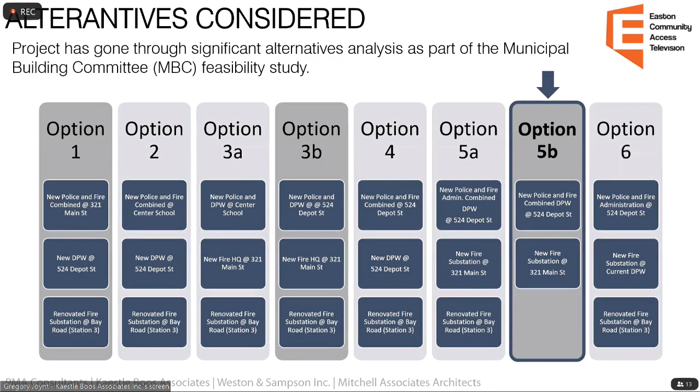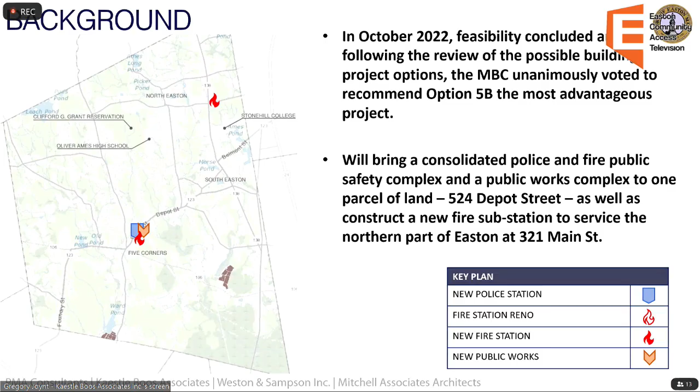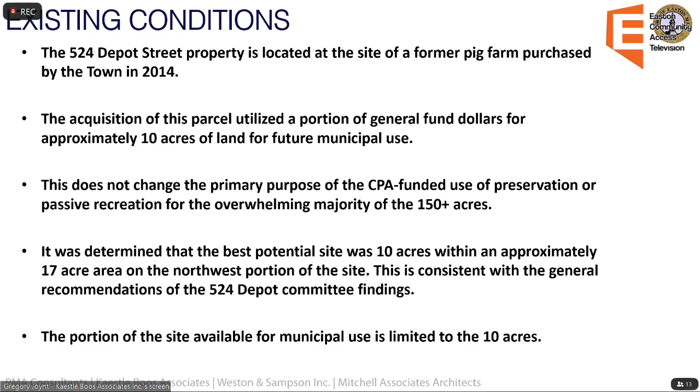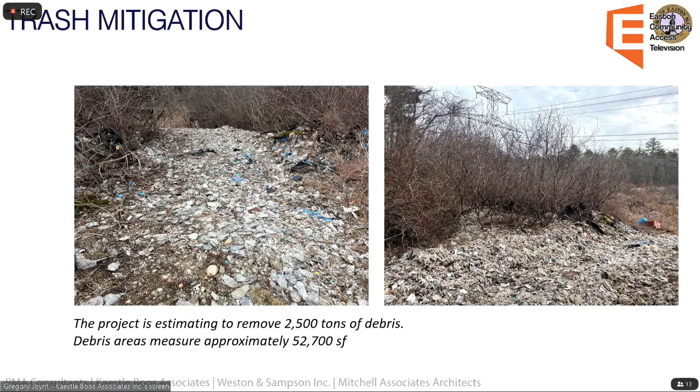One thing this project does achieve is significant trash mitigation on the existing site. There's about 2,500 tons of debris covering an area of about 53,000 square feet. A fairly significant benefit for the town being able to remove these items from the site and protect the surrounding area that's reserved for conservation or recreation, really in perpetuity.

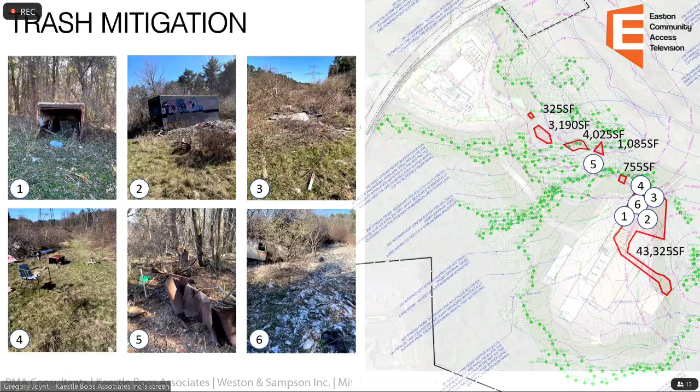You can see here the different areas of trash and debris scattered throughout the site. It ranges from tires and old trailers to old bottles and trash bags, plastic bags from old bread containers, milk bottles, and things like that. The trash is significant; however, it is relatively confined to these areas. It is all surface waste, so easily disposed of, though it is pretty extensive.

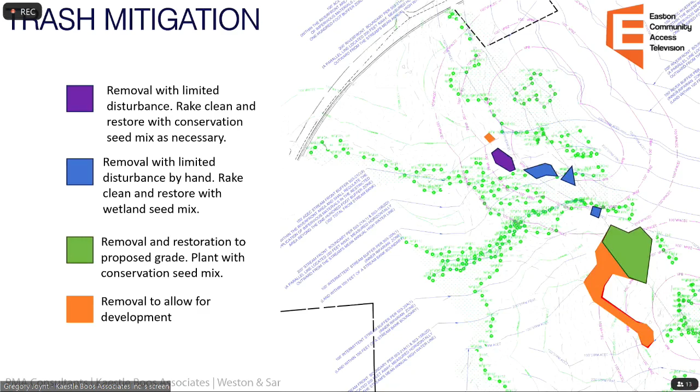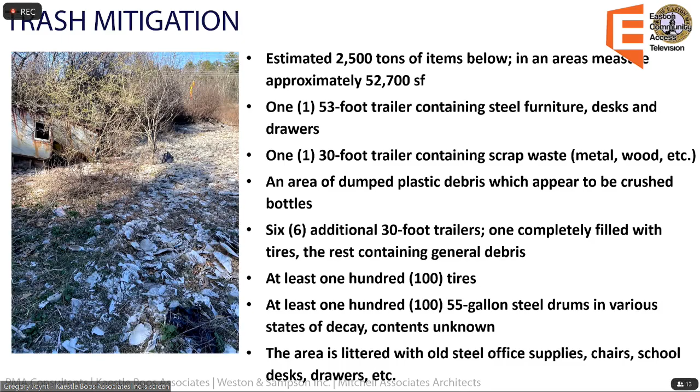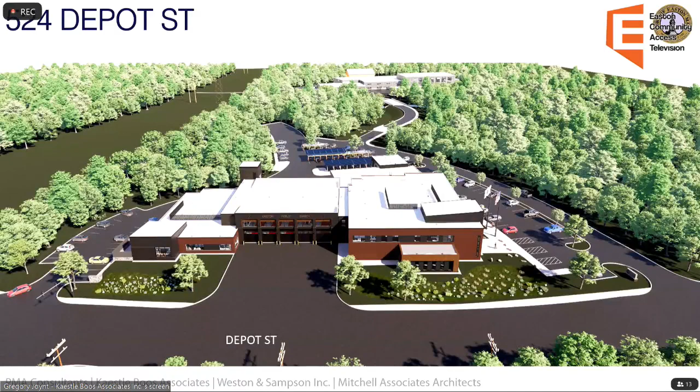You can see here, looking over Depot Street, so we're at the north of the site looking to the south, public safety in the front, with DPW, that large gray building behind in the back. Public entry will be on the right-hand side, so that right-hand drive lane is the public entry with public parking on the west of the site, along with a roadway to get back to DPW. Managing those wetlands, two bridges cross the wetland areas, so there is no permanent wetland impacts on the site. Only temporary impacts for construction are proposed.

In terms of schedule, our anticipated schedule would be to bid December, January, with mobilization starting in the spring of 2025, clearing and grubbing the site, at least the front portion, starting in summer of 2025. Excavation for bridges, the public safety building and roads would also be in summer of 2025. Setting the bridges would be in fall of 2025. The bridges will be set, and then we can begin clearing and grubbing of the DPW site, excavation for that DPW foundation in the winter of 2025. The public safety building and the public works building will ultimately be in construction simultaneously in some fashion, with the project anticipated to be complete by January of 2027.

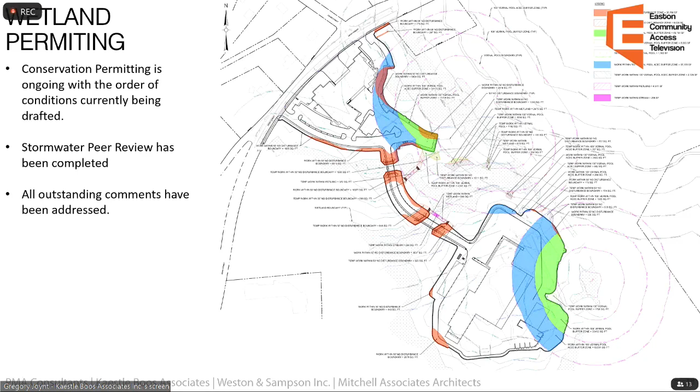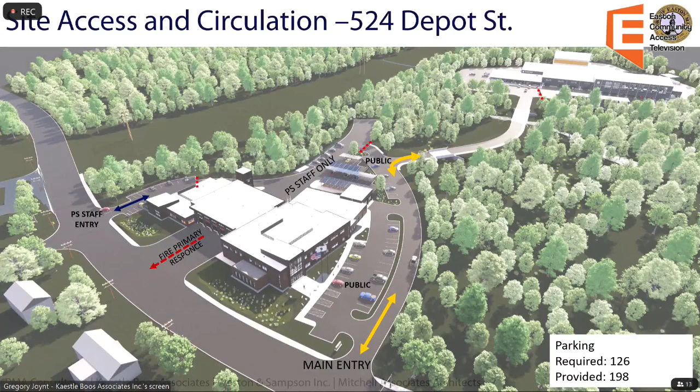Just a little bit more about the site. We'll get into a couple more details about the proposed construction. This is again looking over Depot Street, and we're going to talk a little bit about site circulation. The main entry is at the bottom here with the yellow arrow for public vehicular circulation, as well as circulation back to the DPW building. Public parking for the public safety building is on the left of that public drive lane, as well as the fire staff parking and public police staff parking, which would be on the exit and entry across from Cross Street, on the other side of the public safety building.

Primary fire response comes out the front of the building, and secondary fire line response comes out the back of the building, coming out that public safety staff entrance. Public Works is in the back of the site, across that roadway with bridges on it. Public safety staff parking is in the back, cordoned off from the rest of the site, so only police, fire, and DPW vehicles can be back in that area. I should note there is a large snow storage area in the back of that public parking, staff parking area, for snow storage on this site.

As we go back towards Public Works, again coming over the roadway, we're just spinning you around a little bit so you can see the front of the building. Public and staff parking out front in an accessible area. These red dashed lines indicate fences and gates, controlling access for vehicles during off hours and even during the day.

Vehicular operation for the DPW generally circulates counterclockwise around the building, keeping the drive lane clear and easily visible from drivers, so they're always looking on their side of the vehicle and able to see what's going on in the yard.

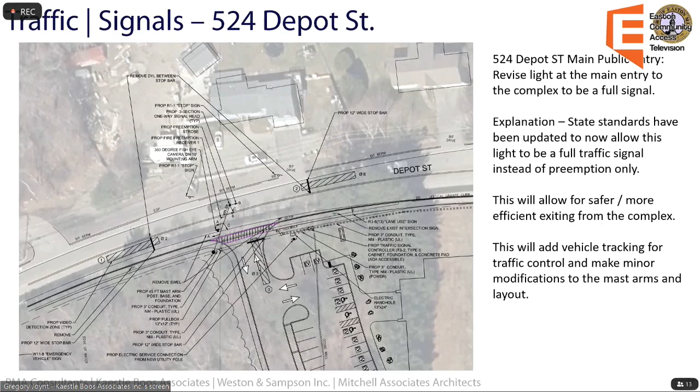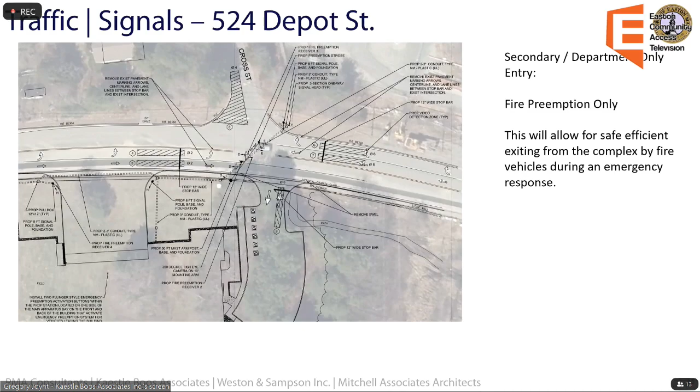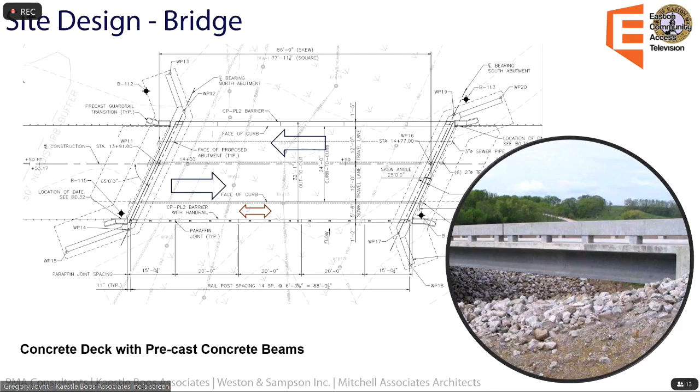The canopies have either recessed cans under them at most of the buildings, and at the fuel island they have a pretty standard light fixture you would see at a gas station. A couple of other minor lights, column lights, for accents, as well as sign lighting to light up and illuminate the permanent building signs for the complex.

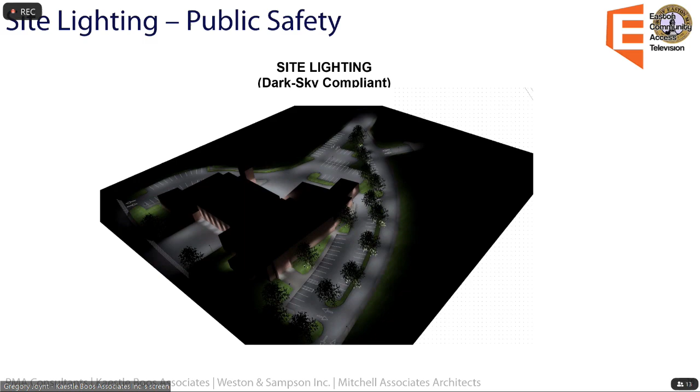In terms of what that results in for photometrics, we have a rendering here for the property. As you can see, it was really important for our team and the town to make sure we're cutting off our light as quickly as possible as we go into those areas of environmental concern with the wetlands.

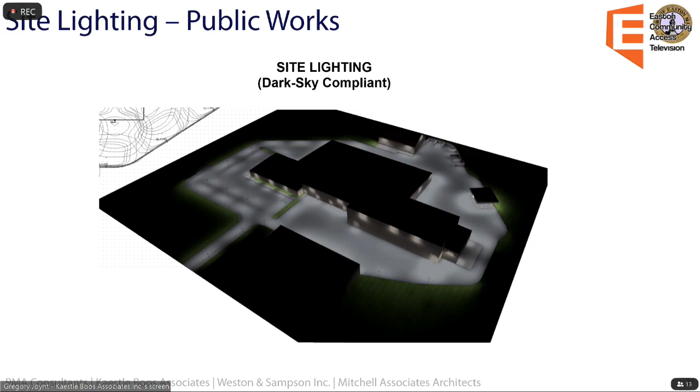We feel like we've done a pretty good job of keeping safe lighting levels on pavement, parking, and pedestrian ways, while cutting off quickly to get dark sky compliance as you go into the wetland areas. Back at DPW, it's the same process, but with much bigger areas given the size of the vehicles and operations. We're trying to cut off almost immediately as we get to those development lines outside of the paved area.

A little bit about our landscape and site improvements that we're proposing. Pretty typical for public projects: flagpoles, and most improvements will be large stone granite bollards or rock, as we look to ensure not only the aesthetic value of the project but also safety, keeping vehicles excluded from getting too close to the building.

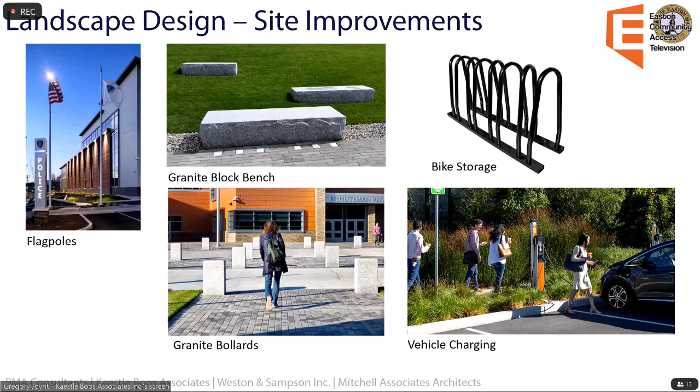The project will include bike storage racks as well as vehicle charging throughout, in different locations, with some accessible to the public and some for staff and department vehicles throughout the complex.

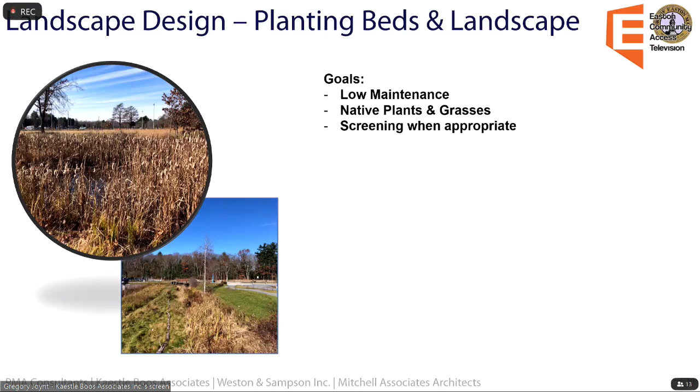In terms of landscaping, very minimal. We're really looking to make sure this is a low maintenance environment. So a mow strip around most areas for turf grass, turning to more of a conservation and wildflower seed mix.

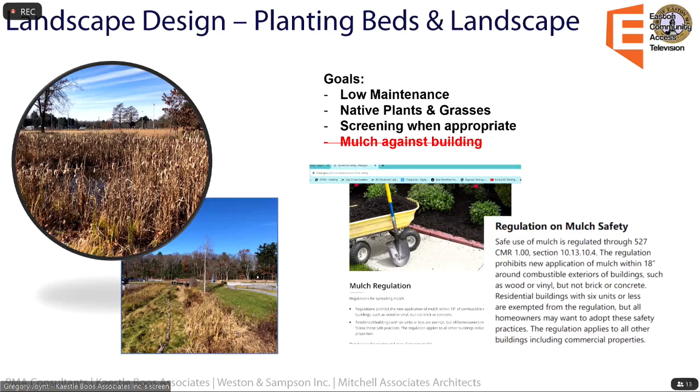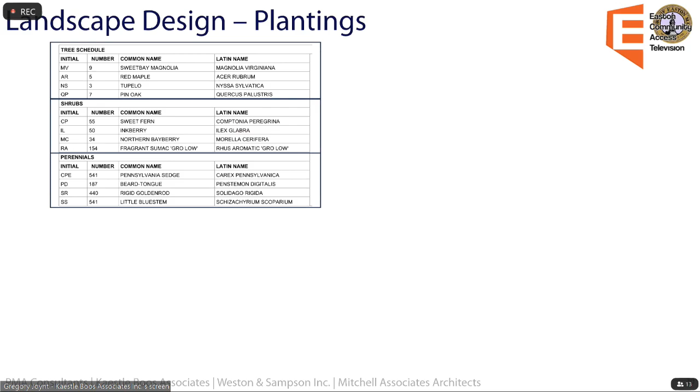No mulch up against the building, to make sure we're not starting fires with cigarette butts or things like that, keeping these buildings safe. In terms of plantings, all are proposed to be native species, with trees from red maple, magnolia, pin oaks, and it sounds like we might get some chestnuts too from the Conservation Commission. Again, straightforward, low maintenance, and native plantings.

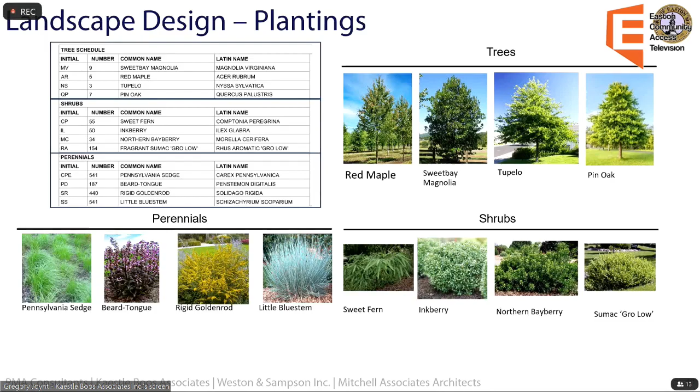In terms of stormwater, Elena's on, so if I make a mistake, she will correct me. But really there are 3 or 4 big areas where we're trying to treat stormwater.

The first is a bioretention swale. Bioretention swales are really an on-surface treatment of water, with treatment and storage happening in the same swale.

Subsurface, because of our site constraints, most of our treatment is subsurface, particularly up at public safety. Both subsurface detention and infiltration are proposed.

Surface infiltration, shown in the lighter green color, is a small area at public safety, but primarily back at DPW, where we're going into surface infiltration basins.

And then just a really minor area where we're going to some dry wells, along that corridor that gets you back to the Public Works facility, with catch basins and dry wells to pick up that small area of pavement.

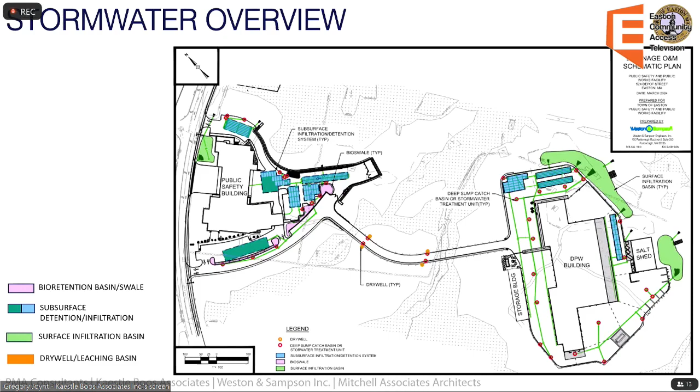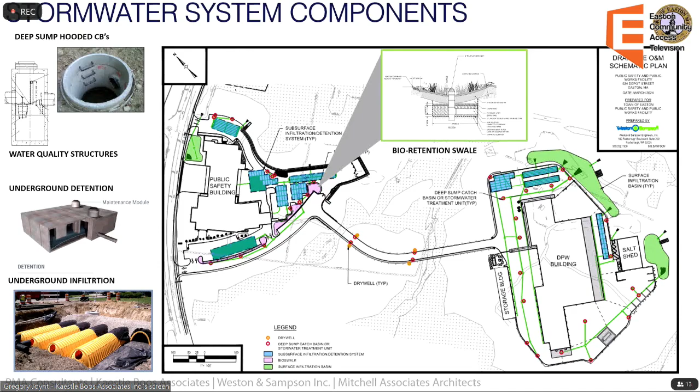We did touch on briefly the salt storage and fuel island. A couple things we want to address: all of the town's fueling operations, salt storage, and loading operations will move to this site back at the DPW.

On the site there's also a knockdown area, where gross cleaning can happen for trucks coming back after salt operations, as well as a full truck wash inside the DPW building that will clean the trucks and maintain the town's fleet safely for a long time.

The salt storage also includes a brine operation, a saltwater solution stored in tanks next to the salt storage shed. If folks have seen lines on the pavement before storms, that's brine, and that's what would be housed here adjacent to the salt storage shed.

That area also includes a loading ramp for safer, easier loading of the trucks, a small raised area where the loader can drive up onto instead of lifting all the way over the bed of the trucks, providing for safer operations.

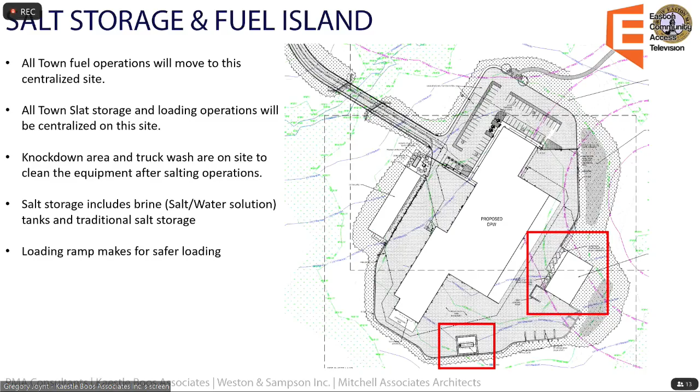Just a bit about what they look like: the salt storage shed is proposed to be a fabric membrane tensile structure, with push walls keeping the salt contained even if a loader pushes against it, making sure we keep the surrounding environment safe.

The salt is dropped entirely inside the facility, and as best practice, it's raised up a little above the surrounding area so that any runoff goes directly to the stormwater management system and not into the salt storage area. As for the fuel island, the tanks are all double-walled above-ground tanks, with no buried tanks here.

10-gallon remote fill box, so no real issues with minor leaks or things like that. Both tanks are equipped with overfill prevention, so you can't overfill the tank, as well as audible alarms for high level to prevent overfilling. Spill buckets with absorbent materials, pads, brooms, everything you need for spill containment is included in the project and is with the fuel island.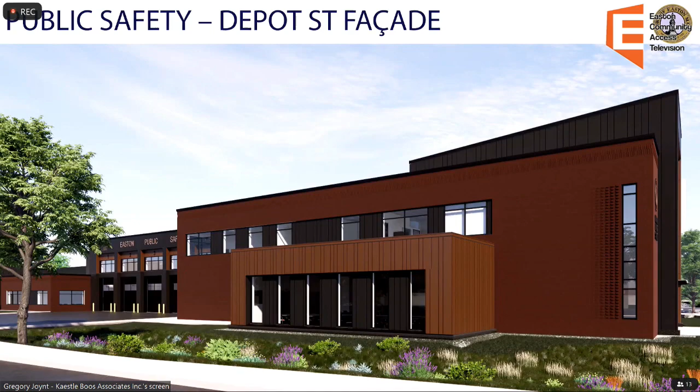As we go kind of along Depot Street, seeing the front of the building, as we go west to east along Depot.

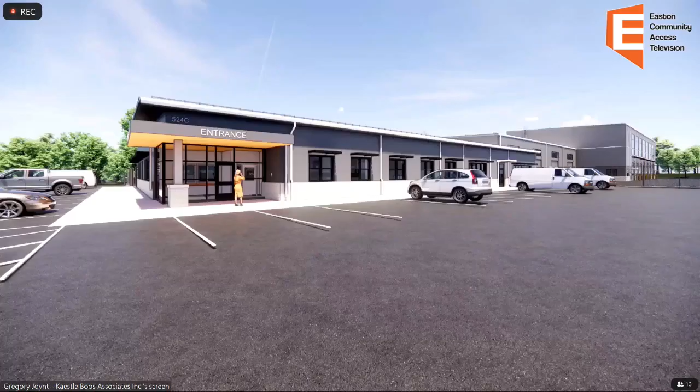Coming back around into the public parking lot, a large main entry signage on the building. This is really the public entry and face for the public safety building. And back to the public works building, again, public face for public works in the back of the site.

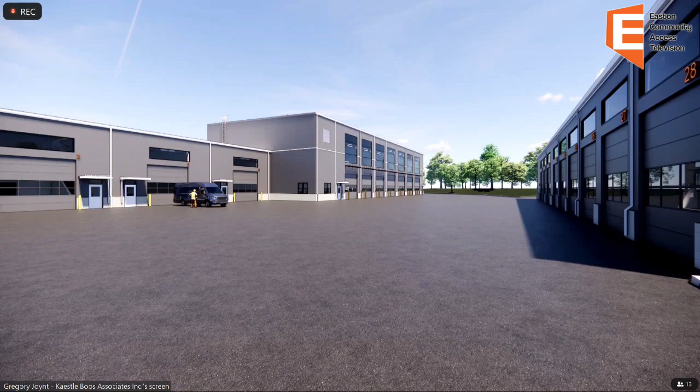Back in the work yard, to the right, the storage building for public safety and the workshops for public works. And just a view a little bit raised up of the backyard knockdown station, that stair and platform you see at the end of the building.

Right adjacent to it is the truck wash. The large area here is the truck storage, so all the vehicles will be stored inside there. We're actually showing a non-tensile structure salt storage shed, but it will be the tensile fabric structure as shown before, and the fuel island here.

So again, just backing up, a broad picture overview of the site and what it entails.

And that was it. So I covered a huge amount of information. We have our team here to answer any questions specific to any part of the project. Happy to address anything the board may have.

All right, thank you very much for that presentation. That was excellent. Stephanie, I'll start with you.

So just some of my general comments. Throughout the process of pre-permitting, there were several meetings held to talk about the direction the project was going in and receive feedback from the town and various town departments. Those have been responded to and incorporated.

I think there were questions about traffic flow, how you're protecting the public when they're entering into the complex from the emergency vehicles that might be exiting. You saw demonstrated here, there's complete separation. And they discussed how the traffic signaling will operate for the general flow of traffic into and out of the facility and along Depot Street, as well as when the emergency vehicles are leaving.

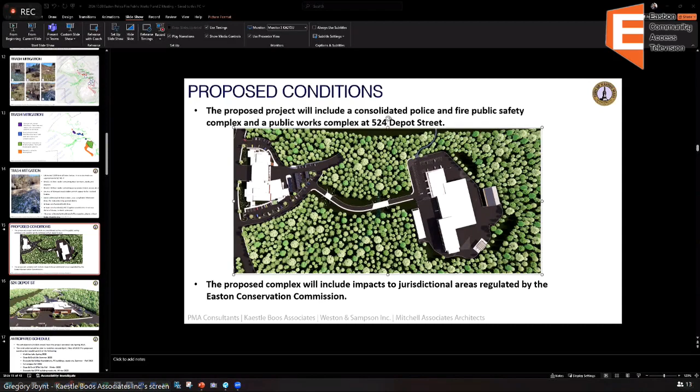This may be a real basic one, but is there a sidewalk connecting—is that what I see kind of on the bridge? Is that a sidewalk between the two buildings, or is there a thought for pedestrians who want to walk between the two buildings? Yes, there is a sidewalk included connecting the two buildings, also across the bridges.

So 2 drive lanes on the bridges, as well as a 5-foot sidewalk connecting both places. The thought is, we do have a very popular fire department that throws a good open house every year, so overflow parking during those times could be back at DPW with pedestrian access back up through the site, so that you really do have the ability to use the site for pretty much any condition the town would like to use it for.

Excellent, thank you. Other board members? Amos? Yeah, was there any thought on the design of this building to make it more energy efficient? And the second question, I see a lot of roof. What brings me to that is: is solar photovoltaic use implemented on those roofs in order to facilitate energy efficiency and alternative sources of energy?

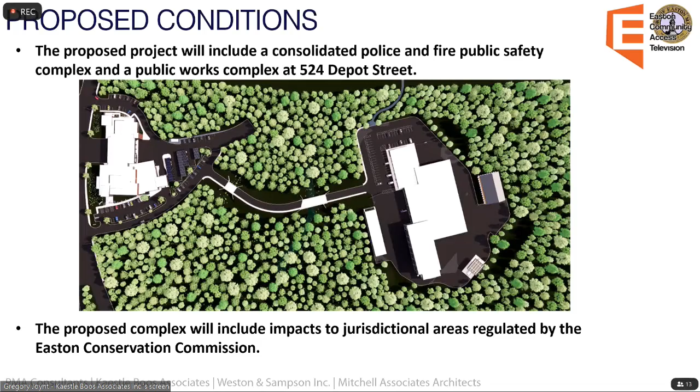To be clear, on this site we're looking at, there's no public trail access—that will be on a totally different site, though still part of the same parcel, just on the other side of the power line easement. Let me show you: our parcel is here, and this is the power line easement.

Right on the other side of the power line easement, there's a curb cut, a break in the stone wall, and that's really where Mr. Gill used to live. That's where the new trailhead is proposed—it's a little cleaner and more accessible for the public, so they don't have to go all the way back to DPW to access the trails, and it ties into the existing trail network there.

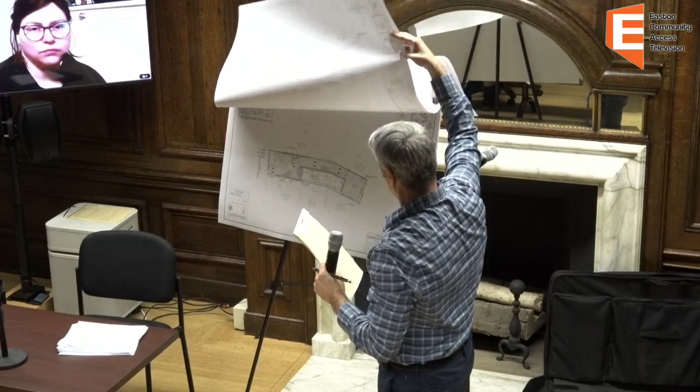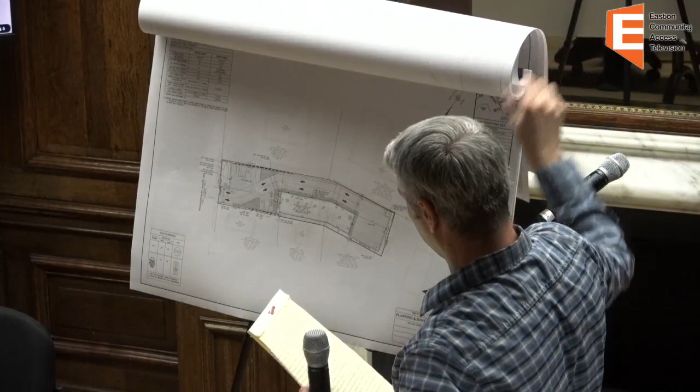The Godfrey family, owners of Godfrey Auto, are looking to expand their auto repair business on their existing property at 612 Washington Street. Currently their building is located here with 3 service bays. Their business is growing and expanding, and they want to stay in Easton. So we're proposing to take down the building and replace it with a larger one with 4 service bays along here and a longer bay in the back that will also store their flatbed tow truck.

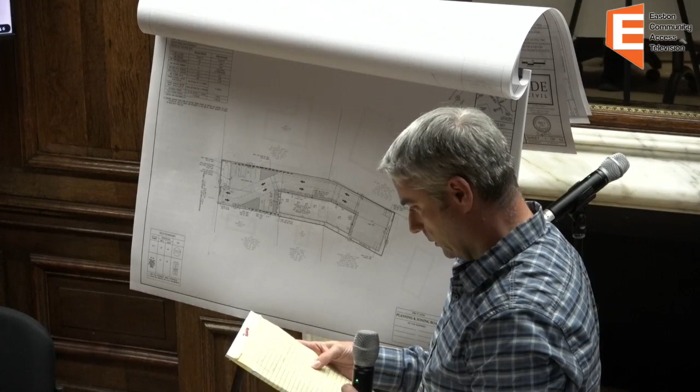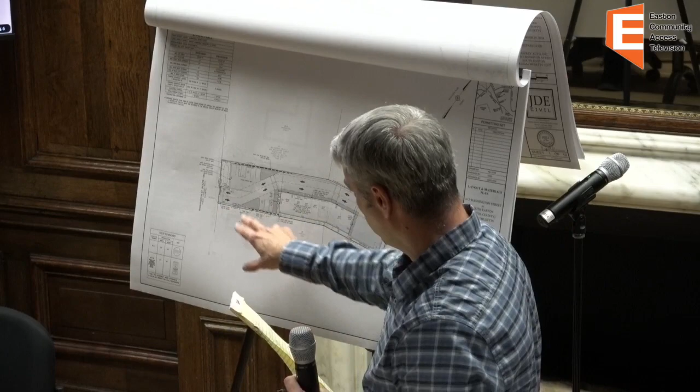The site is zoned the Cohasset Commercial District, located in Commercial Subdistrict B. The use is allowed in the zone as stated in the staff report. The locus is on the easterly side of Washington Street next to Dunkin' Donuts, surrounded by commercial properties to the north, east, and west, and residential properties to the south. The site is accessed by an existing curb cut on Washington Street, Route 138—we're not modifying the curb cut, so we won't need to permit through Mass DOT. It's currently 2-way access, and we'll maintain 2-way access into the site.

For parking, per the bylaw, we're required to have 6 spaces. We're proposing 9, including an accessible space, plus an area in the back for vehicles that are being worked on.

The existing small retaining wall here entering the site will be removed in order to provide better access to the proposed parking. The traffic flow pattern is laid out so that the flatbed truck can get to the back of the site and park in this area, or pull into that rear garage door.

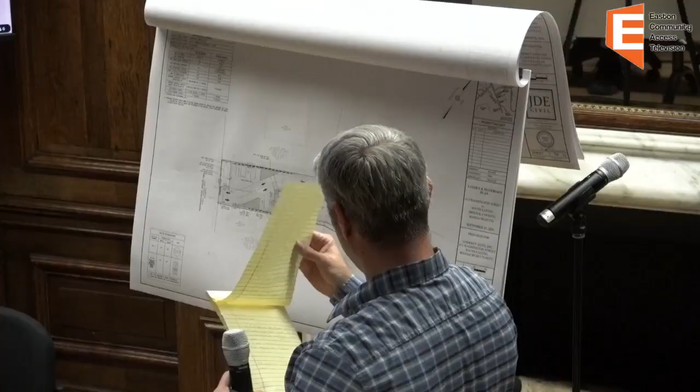The site is an existing non-conforming property, and we have already been to ZBA and have a variance for the side setback. The existing side setback is about 5.3 feet, and we're proposing 6 feet, so we're improving it slightly.

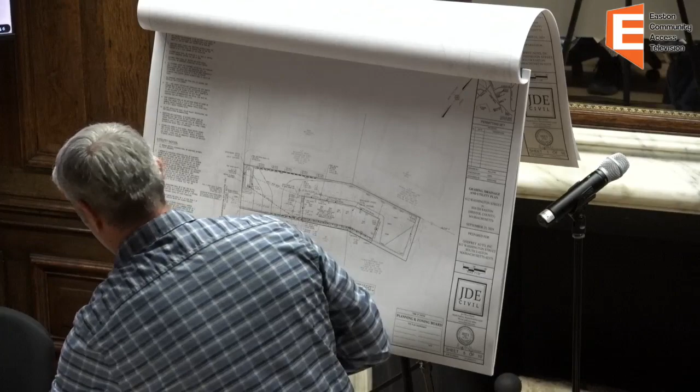For site utilities, we're going to be connecting to sewer and will be filing with DPW soon for that. We're showing a water connection through here, but we've already received feedback that DPW does not want that to go through the stormwater basin, so we'll be realigning it to be about 12 feet off the proposed sewer line and going out through the entrance. So we have a new connection for that.

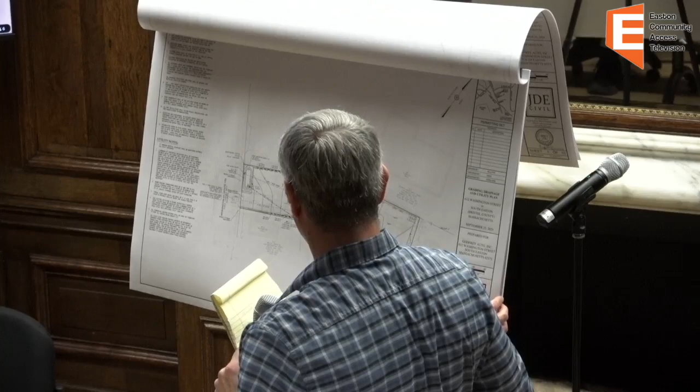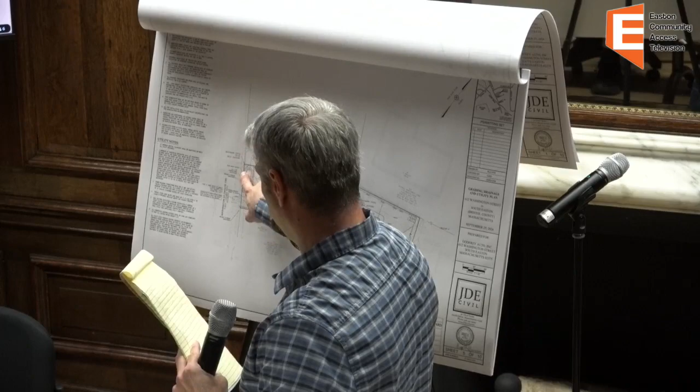Drainage: the site currently has no drainage infrastructure. We are proposing to capture the roof runoff and direct it into a small basin at the front. We're improving green space on the site by removing some impervious area and paved area, adding more roof area. Overall, the impervious area for the site is being reduced slightly.

And that's the overview of the project. And we did receive some comments.

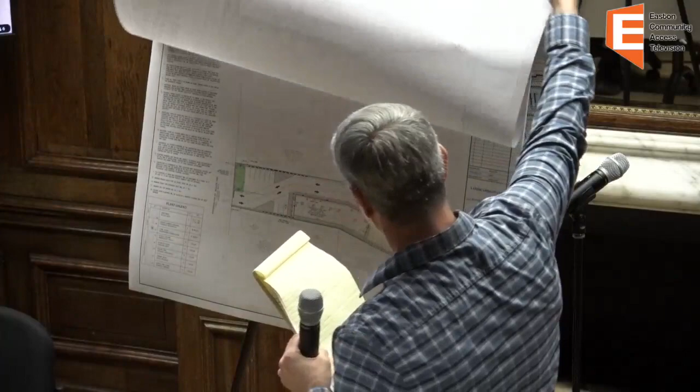Landscaping as well. As I said, the site is mostly paved. We'll be loaming and seeding the limited areas that we have, and adding some plantings around the front, new green space.

So that's the overview of the project, and we did receive some comments from staff and some of the reports. All right, thank you. Stephanie?

My primary comment: the narrative indicated that this was a redevelopment project with disturbance on a parcel less than an acre, and that it wasn't subject to stormwater management, complying with the state stormwater management handbook. But that is not what the town's bylaw indicates. I believe this is subject to stormwater management review, and it is a redevelopment project, so there are standards that need to be complied with to the maximum extent possible, and other standards that must simply be complied with.

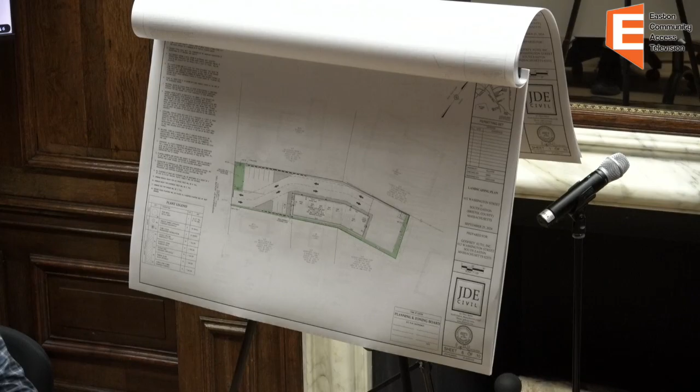So they need to provide evidence of that. I have asked to have the proposed stormwater management peer reviewed, but the stormwater checklist as part of the stormwater management guidelines needs to be submitted, as well as a stormwater pollution prevention plan and an operations and maintenance plan.

A couple of other things, I think the traffic flow in and out of the site makes sense. It works for the use. There do appear to be some opportunities, though. Basically, the site is, as Mr. Driscoll pointed out, completely disturbed, pretty much, and substantially paved.

The plans show areas that are hashed, you can see them easily from here. They're triangular shaped, and there appear to be some areas around the building. They show a very small planting area, and the green area where they are proposing a grass strip. And I believe the retention basin is going to be grassed. Is that right? Yep.

But I think there's opportunity for additional plantings to provide a bit of a buffer to the abutting properties, which are also very commercial and fully developed, but also to provide some visual relief from the hardscape at the site. It really is a very heavily paved, commercial area, so I think there's an opportunity to make it more visually appealing.

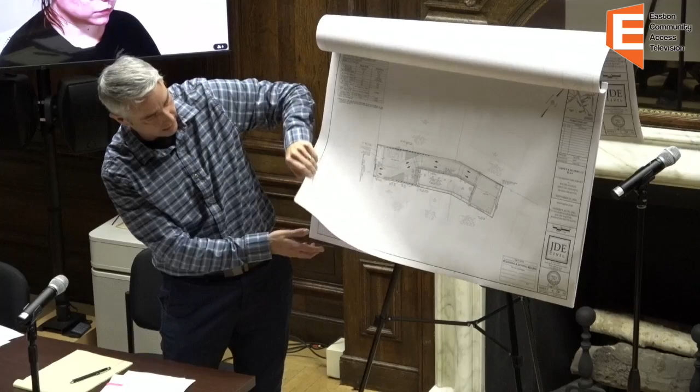The building itself will pretty much be the buffer. As you can see, there will be no windows on the side, and all the doors and everything will face towards the other commercial property. These are residential properties over here, so the building itself will help buffer between the two uses. Along here is the existing green space. We are moving the building slightly further away than the existing building, even though we are expanding it this way.

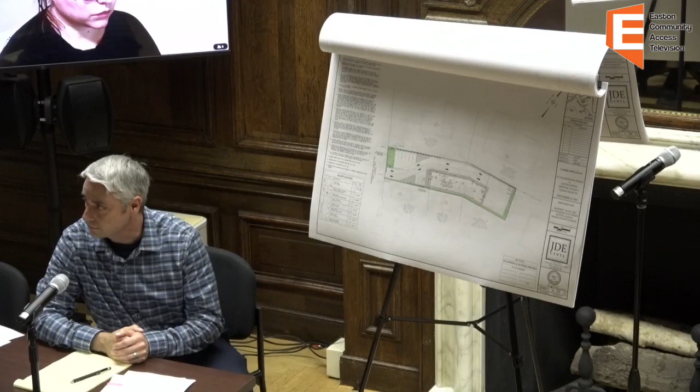Madam Chair, could I comment on the buffer? This site is already built out to the property line, but a building is not considered a buffer under the subdivision rules and regulations and zoning. A buffer is an area set back that provides either vegetation or fencing.

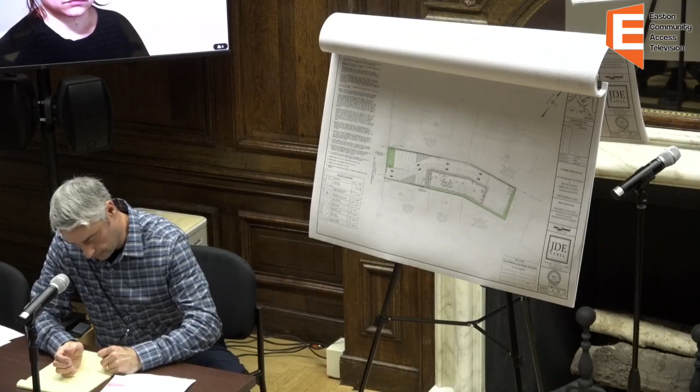Sorry, Chair, can the person speak into a microphone? We can't really hear anything. Oh, yes, sorry, step up. And if you wouldn't mind taking the mic for a moment and introducing yourself. Sorry, that's okay. How about that, is that good? Can you hear me now? Perfect, thank you, yeah, perfect.

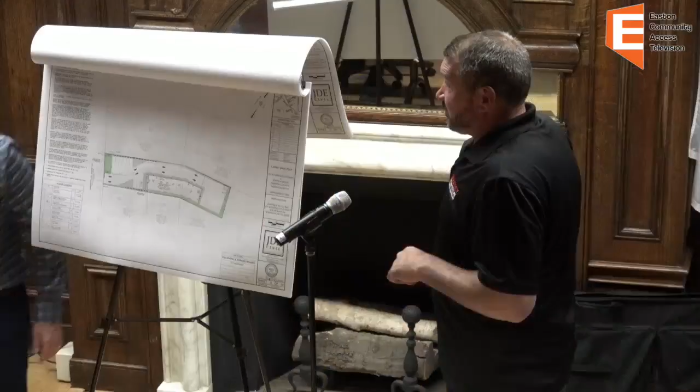There's an existing chain link fence between the neighbors, and a wooden stockade fence to the rear neighbors. But we would actually give our residential neighbors, their multifamily homes, the choice. If they wanted chain link with privacy slats, vinyl privacy slats, or if they would want a solid vinyl fence, that's what we would do to maintain that.

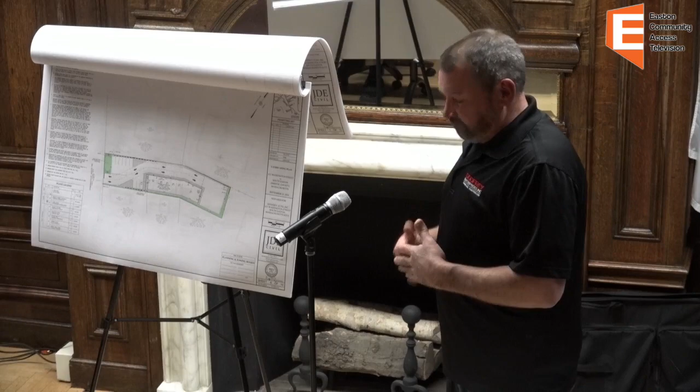And Madam Chair, if he could identify himself. Oh, I'm sorry, could you identify yourself? James Godfrey, owner of Godfrey Auto. Thank you, all set, all right.

Any other comments for the board? All right, Mr. Driscoll, do you want to take these comments and return? Yep, all right, we'll continue to the next meeting and address comments. So you said it's gonna go to peer review? Okay, so who's gonna do that? I don't know at this moment.

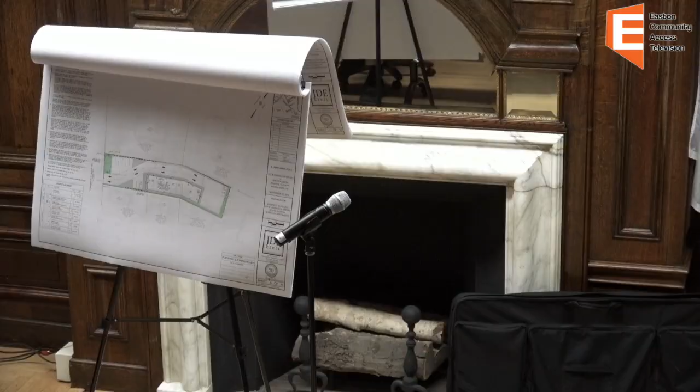So, like I said, I would prefer to submit the revisions, including the stormwater report and checklist that you're asking for, before it gets sent to them, so they have everything. Yeah, I think we're going to have them review this one.

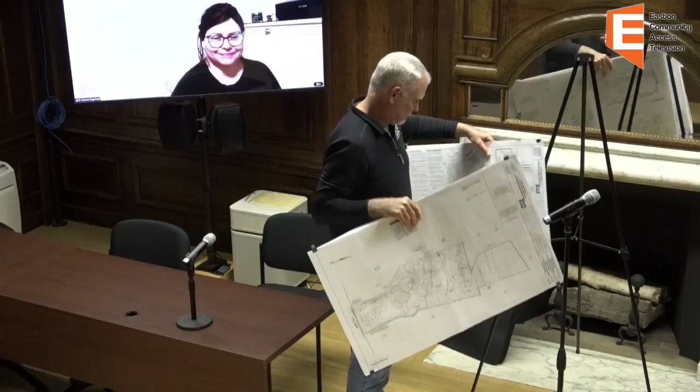You guys can't see it. Well, you have it, we can share it. I know, we can share, everyone can see it. Okay, I think we are good, I think we have resolved it. Or we can deal with 2 Johns. And she gets 2 votes. Right back in the fireplace.

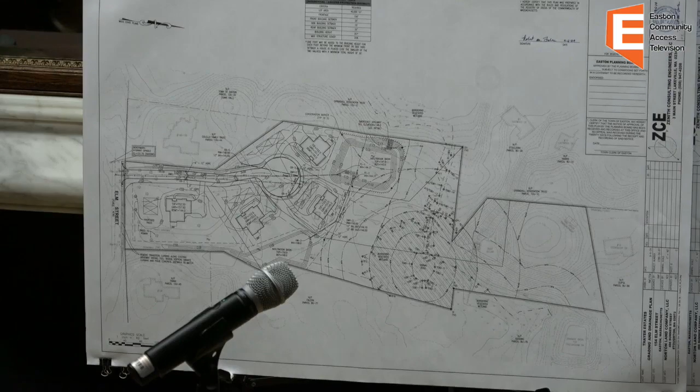So you're seeking waivers of the roadway standards, and generally when the town does that, it's intended for the road to be a private way? Yes. Okay, so that's good.

And then you're showing 4 streetlights, and you show the typical luminaire. It does not indicate if the lights are dark sky friendly or not. Well, they are, but we'll revise the plans to make sure it states that. And generally the board likes to see a photometric plan along with that.

And those were my primary comments. The project is being peer reviewed, and we did receive comments from the reviewing engineer today, which of course the applicant did not have time to respond to.

And then I appreciate that you're considering keeping the root cellar. That was brought to my attention. Absolutely. And I mentioned it to our community planner, who is the liaison to the Historical Commission. He said that's really nice. We figured somebody would be interested in preserving it.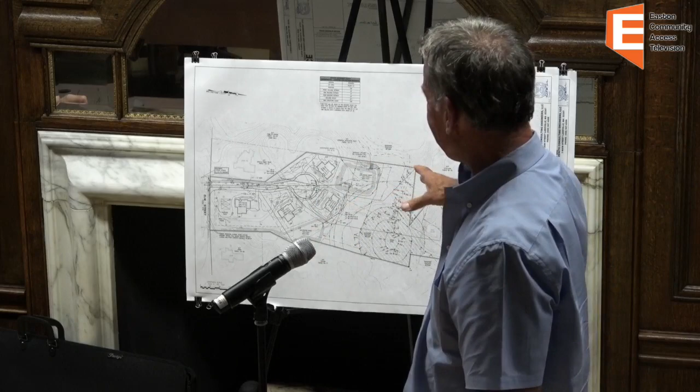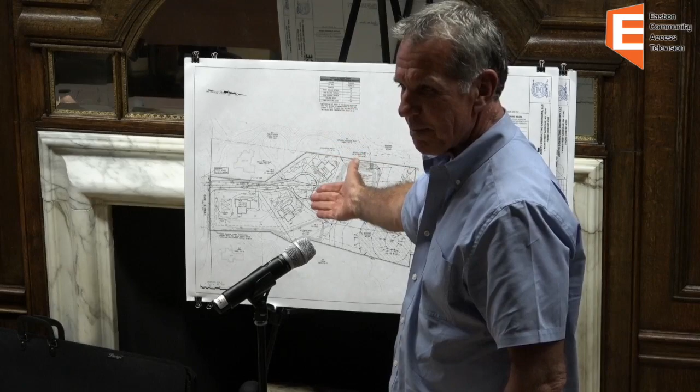You'd literally be walking close to their house, so you can't do it unless you create an easement between the two properties. We could create the easement, but then it becomes an issue of where they're parking their vehicle, and then you've got foot traffic going right next to someone's house.

I understand and respect what you're saying, and in a different setting I couldn't agree with you more, but at least we're preserving it and want it to stay what it is. It is in good shape — it's not falling apart.

Maybe there'll be a family with children who go out in the woods, discover this root cellar, and think it's the coolest thing they've ever seen. The previous homeowner put a fence at the entrance because of liability concerns, but you can still see the domes on top. It's cool — anyway, that's what we've got.

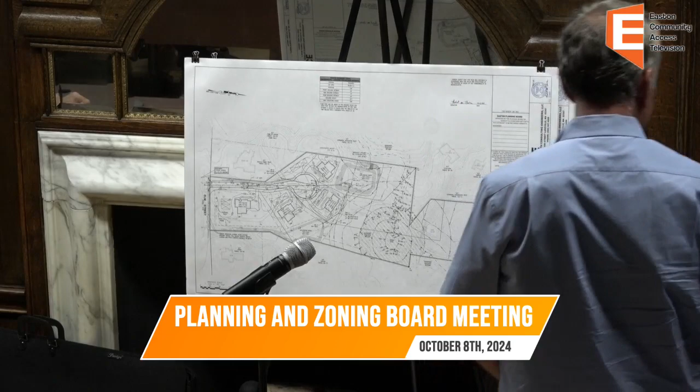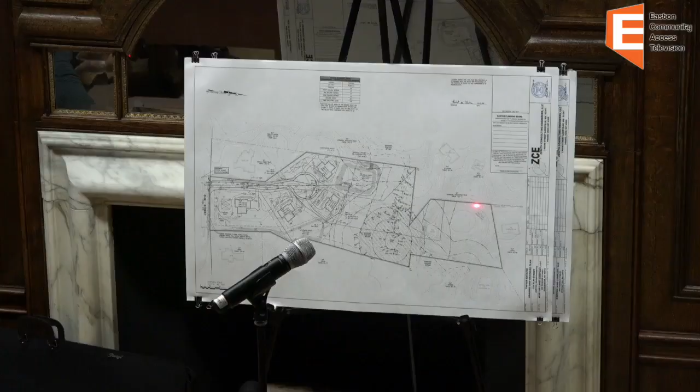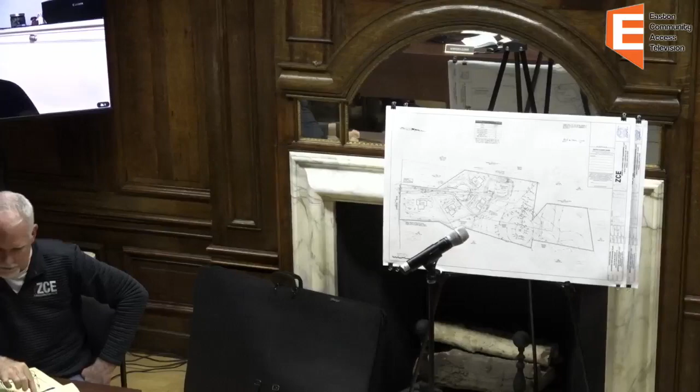If I may, I have a couple questions. My first thought is I see on the plan there's a treehouse encroachment — can you tell us about that? When the surveyors did the survey, they located a treehouse in the back of the property, here. I don't know who constructed it, but they didn't build it on their own property — I believe it belongs to this house here, and they went way over their property line. So it wasn't something the homeowners here were aware of, and that's why it's listed as an encroachment — somebody encroached and built a treehouse.

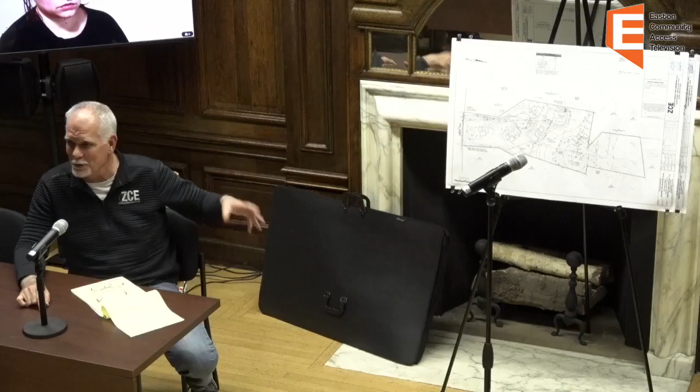Will it be left or removed? Right now we're not planning to do anything with it, so it's probably best to leave it alone rather than bring construction equipment in, which raises legal issues and would disturb the wetlands. It's a heavily wooded site back there, and getting equipment in would make a mess, so we'd prefer not to. If the board or Conservation Commission requires it we'd ask the neighbor to take it down, but I doubt they will since it's outside their jurisdiction. For now it's staying put, and hopefully the kids are enjoying it.

And the stone wall just north of that will also stay put as well? Yes, everything on the north side of the wetland system is going to remain untouched.

My last question, Stephanie — this might be more for you, about how the Conservation Commission works in town — but vernal pools are such an important resource. Does the Conservation Commission ask for signs or flags at these boundaries so new homeowners are aware, or is that not required? The Conservation Commission does require boundary markers at the limit of the wetland resource area, and in fact they provide them. Dave already commented that they wanted more of them, so in the revised plans you'll see more of those conservation signs. It's an excellent question, and yes, we are providing that.

And my only other thing, just a bit of a pet peeve of mine, is that it seems like an awfully large paved roundabout.

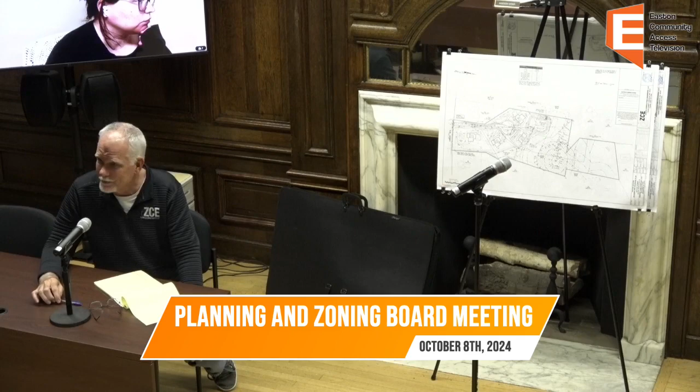I don't see sidewalks here. We are not proposing a sidewalk. Again, there's room to accommodate a sidewalk if this board asks us to do it. It's such a small subdivision, we didn't think it was necessary, but we've provided the grading, and there's a spot for it right here.

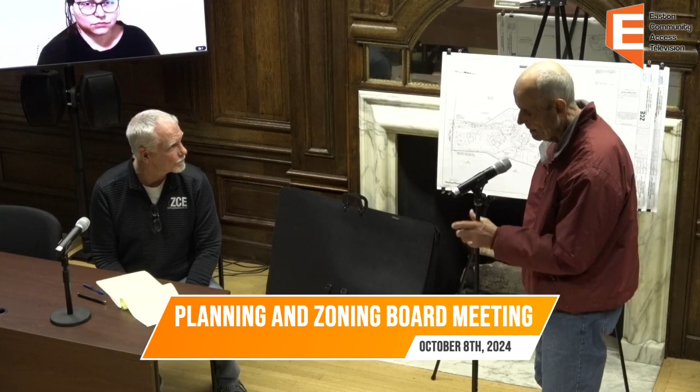How you doing? Very good, how are you? Before you ask your question, could you please go to the mic and state your name and address? My name is Eugene Colella, I live at 150 Elm Street.

150, 148, that's this property. I just kind of would like to know where the new houses are going in the front. Oh here you go, so here's the roadway, here's your house, here's the roadway. There's one house, there's 2 houses, there's 3 houses, there's 4 houses.

So the roadway would be alongside our driveway? Yeah, here's your driveway right here, comes in here. And the electrical work is going to be underground, or? That's going to be a function of whatever this board requires or whatever the local electric company is. It all going to be underground? All the wires are in our yard, so those are all coming out? Okay, thank you. No problem, thank you sir.

Anyone else from the public wanted to comment? Is there anyone online? There is. In fact, if you'd like specific vegetation planted, we'd be happy to try to accommodate you if there's specific plants you'd like along that property line.

I'm going to throw it out real quick that Stephanie usually does the native plant Evergreens planting, native, that's what I would put there. Well, that's what's required, were thinking, because the deer love it. Yeah, I would suggest something like a Leyland cypress. It's going to be an evergreen tree that's going to provide a visual buffer for you.